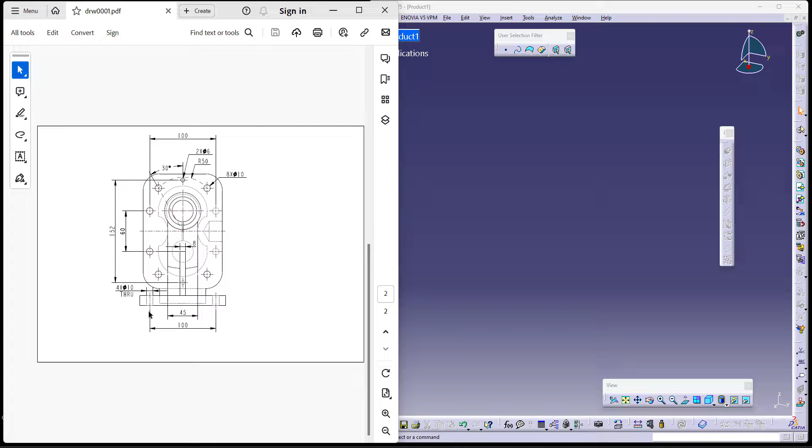I'd like to start with the front view, considering this as my 0, 0. So getting into Start Mechanical Design, since we are working on part design, I have a pad command to add material.

We will try to check the views and simultaneously make the model. It should maintain the exact views as shown in the drawing. In the machine design textbook, they have used the first angle projection, so before proceeding further, please check the angle of projection and then start working on your model.

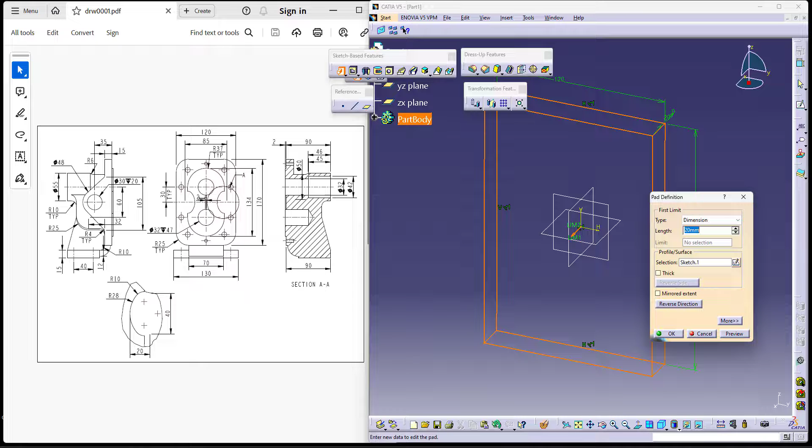Now the material is actually added up to 15. I'm saying this one is added up to 15, so let me try to add that up to 15.

Next, I'd like to add the shape. If you can see, the shape is actually added only till here, which is up to 2 mm. So I'd like to take it on this. Since it has dark lines, that means it's present over here.

In the next view, as you can see, it is hidden lines, that means it's not in the back view. This is in the front view, so I'm using the front view to create the same.

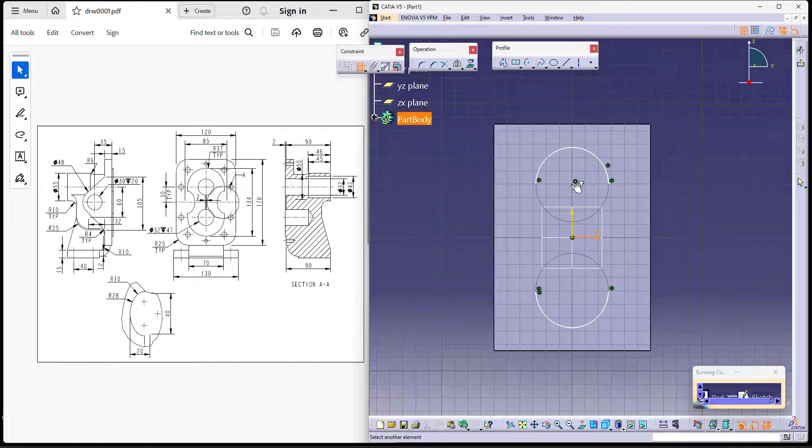And then I can use arcs, or I can use a circle as well. So let me try to take an arc and then mirror it onto the other side. Now the distance between this and this is 30 typical, that means both circles maintain equidistant from the center, so I can give that as 30.

Now the radii of this is 37, as you can see, so I'm giving this as 37. You can join these two by using your bitangent line. So I can just use bitangent line and bitangent line. Let me try to see if there are any openings or gaps. Since they are, let's try to join them together.

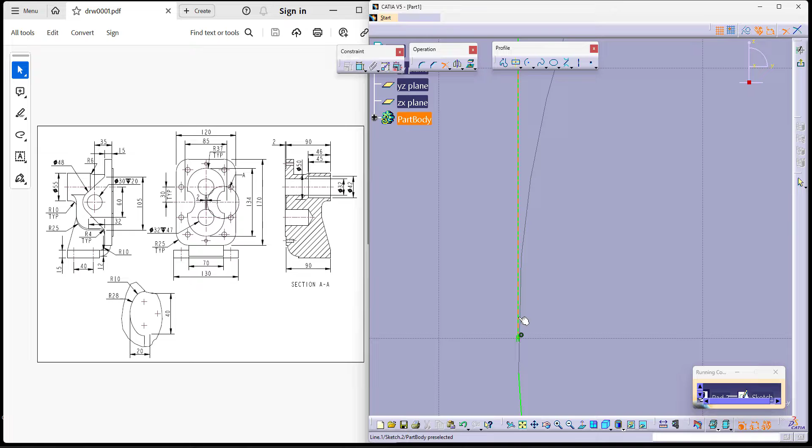This is my sketch. This is only added up to 2. I'll make this and cut later. So this is only till 2. You can see the feature.

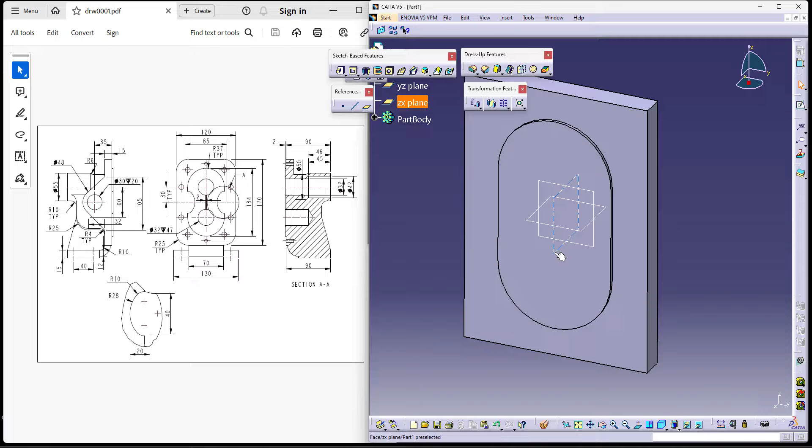Now you can start making the base, or you can start making this extrusion, but I prefer doing the base, as you can see. So I'll be working on the right view. First, let me try to make a sketch of the view and then proceed further.

Now let me go back to the right view. You can also use H and V variation, as you can see it's running from here, or you can also use the left view to create the shape, as you can see from here. Either way, whichever you're comfortable with, you can work on it. Right or left, it's pretty much the same.

I'm taking the arc from here and starting, as you can see. I'll start from the inner side because the inner side is actually controlling the full body. Let me go back to the right view and show you how it looks like. This is how it looks like.

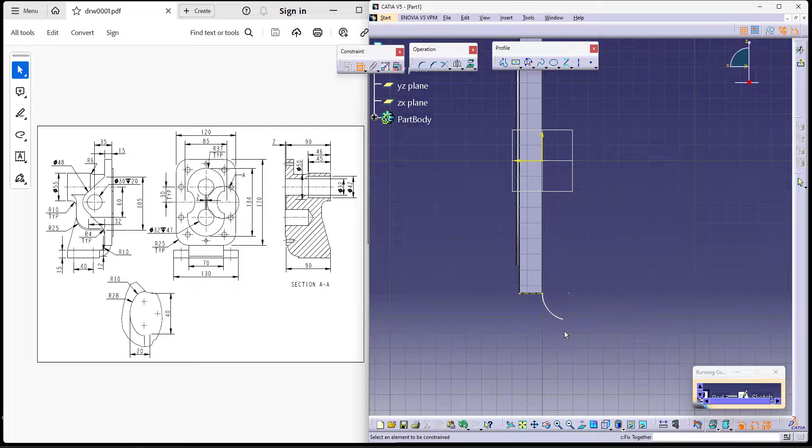So we do have to maintain certain dimensions again, so let me try to take those as well. This is supposed to be 10 as shown in the drawing, which we have just seen. Now this has actually been offset to 12 to create this shape.

So I'm just trying to use an offset command rather than stressing out and doing it again. So this is my 12, and we do know that we are supposed to join them together, so we can just directly join them. This is the first join. While doing the second join, I would prefer R10 as the main one because that is the first reference I have, and I can join these two as well.

Now this length is again 12. You can give this or you can constrain it as well.

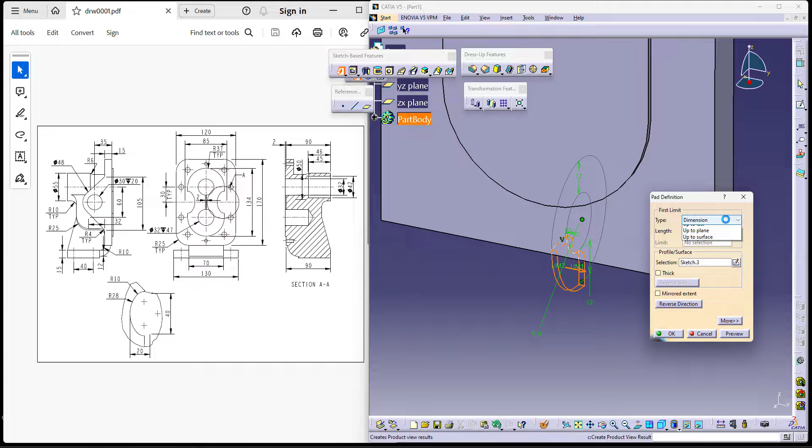Now let's see how much we're supposed to add. This is added up to 70 as shown in the front view, but I'll use a mid plane, which means I'll give 35 on either side.

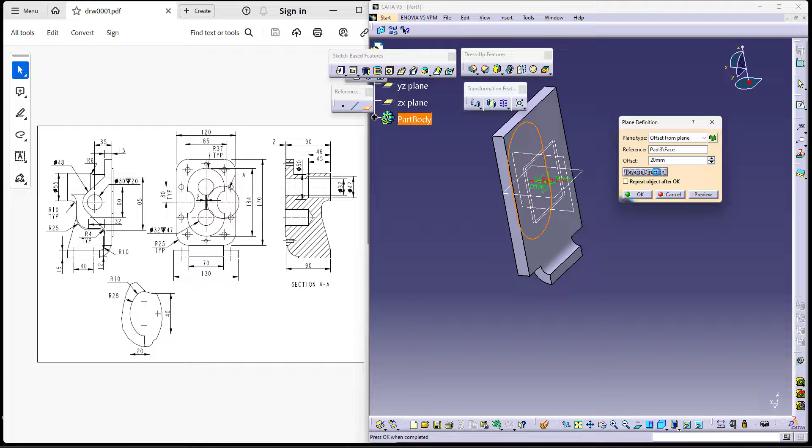Now, while continuing the model, let's keep in mind to maintain the dimensions. The base is actually till 90 from the back face, from here. So instead of subtracting, I'd like to take a reference at the 90 and use that as my reference for modeling. Now I can maintain the 90 dimension as well as the exact dimensions of the rectangular feature. As you can see, the rectangle feature begins from the top, from here.

So let's use this as a reference first and start making our model, which is a simple rectangle, and start constraining it as per our drawing. First and foremost is maintaining symmetry. Second is the length, given as 130, and the height is 15. So I'm taking this as 15.

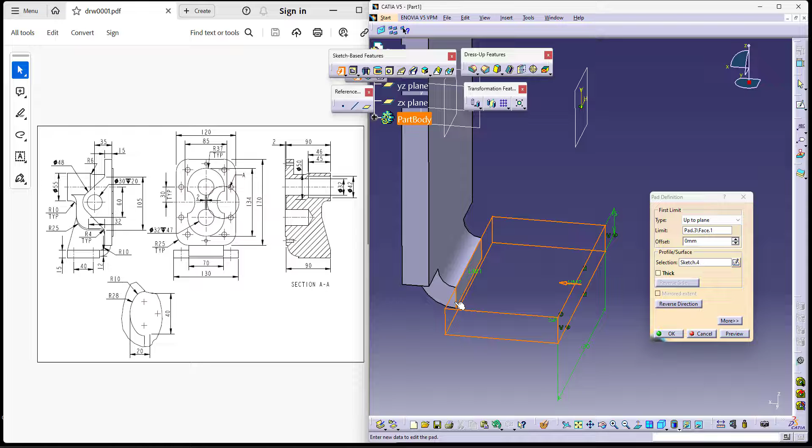Now, how much do you want to add it to? Since we've made it on the new plane, you can add it up to the next or up to the plane. But instead, I'll just select up to the plane and then select the face, so it can understand and add till then. Also, another important thing is if you move or make changes to this, the feature also auto updates itself, giving you a good flexible feature-based modeling if you use these types of references.

Now, continuing, I do have a feature here. I'd like to start from here and slowly create this support, then create this support, and add the shape. This is the process I'd like to follow, and then we can start removing whatever other shapes we have. To begin with, to add this, I have 46 and 50, and I don't know the overall length and everything.

So what I'll do is use shaft and add the material, because I know the overall 90 and the 46, and I can easily maintain it using the shaft rather than using my extrude or pad. So continuing, this is my reference.

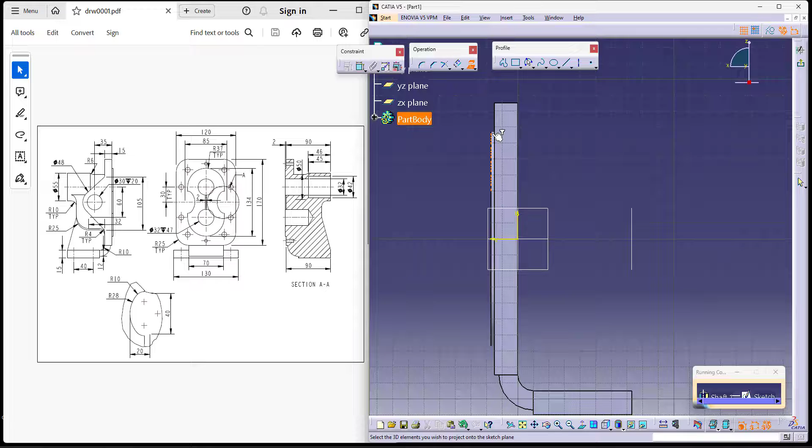The reference is similar to this, the circle which is 30. It's in the same line. You can use that reference, or of course you can take your own 30 dimension, but I use that—it's a little easier for us to do it. Going back to your right view, this is another reference which we'd require.

Now let's start making the actual profile of how we'd require the shaft. It goes this way, and I'm joining all of them together.

Now, we know that this is 46, the inner cut is actually 45, so they just got clubbed together. So this is 46. Let me try to move it this way, and then the overall dimension.

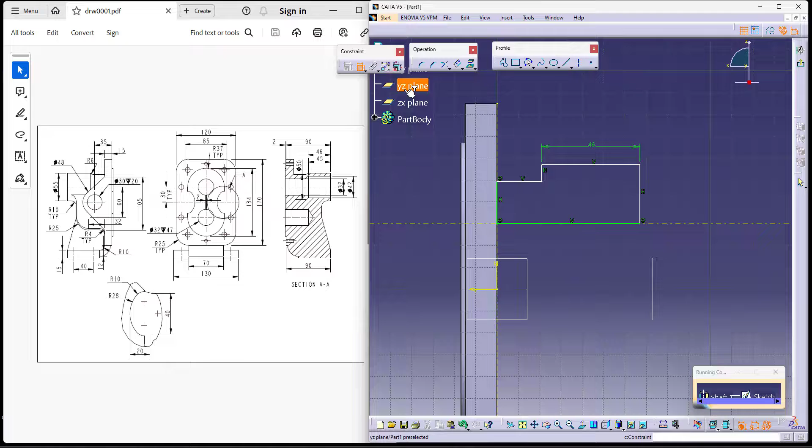Again, the dimension is from this face and not from this face, as you can see, but this base dimension was from this face. So I am trying to give this as 90. And you can see the dimensions.

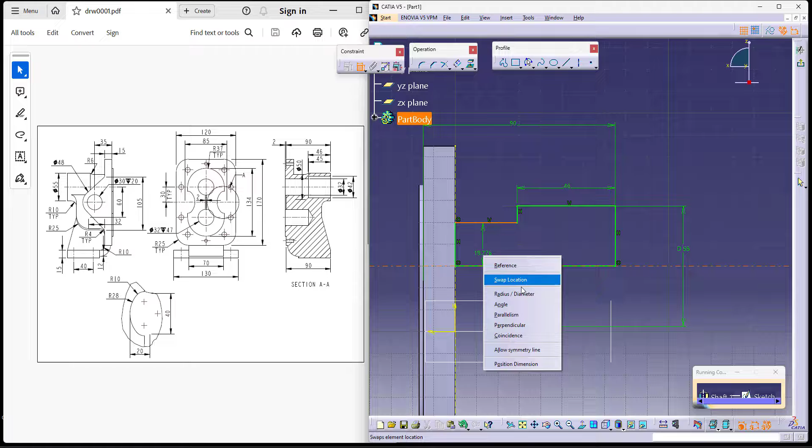Now, let's give the diameters. This is 55, shown over here. This is 50, again shown in the same view. Exit, and it tries to create a cylindrical shape. This is the cylinder.

Now you can give rounds here, since we're working on our supports. There's a round at this location, if you can see, R6. Let's try to give that and proceed further. I don't think it can take R—okay, it took R6. So, warning.

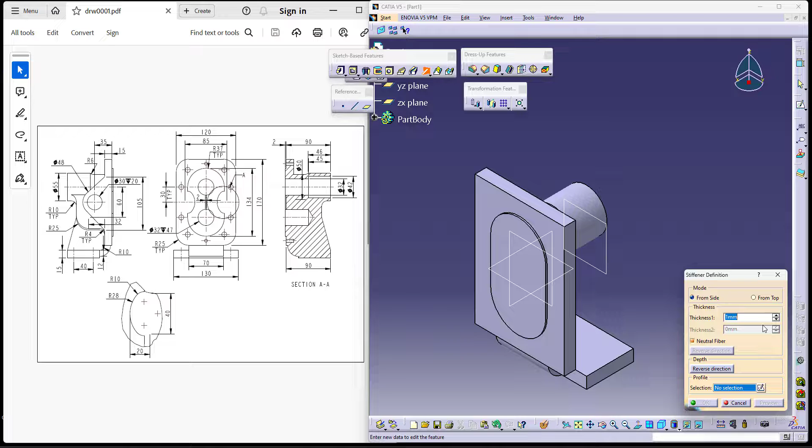Now let's try to create the support. We do have a stiffener as a support, and I'm trying to make it on the right sketch itself, considering the right view. I would like to use my references of the circle and the edges. So first, let's take this edge.

I don't need that, the base edge, and I would require these as well. So let me try to keep it in construction mode only and select this as my reference. The support is actually of this manner.

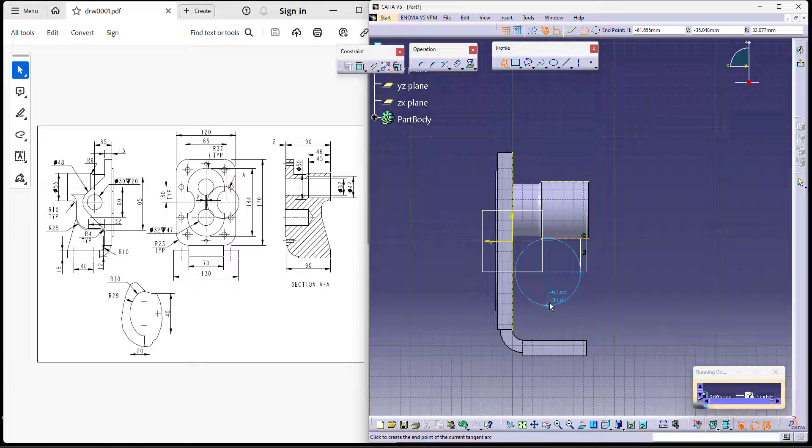Dimensions are given with respect to the center of the arc. I'm actually trying to take it this way and then try to keep it here. There is no tangency over here actually, so I'll try to delete that.

Now the dimension from the center to this is 60. Similarly, the dimension from the face to the center is 32, or face to the line, the end of the line is 32 - it's pretty much the same thing. Now we do know the radii, which is 25, so I'd like to give this as 25. And there is a vertical constraint missing on this.

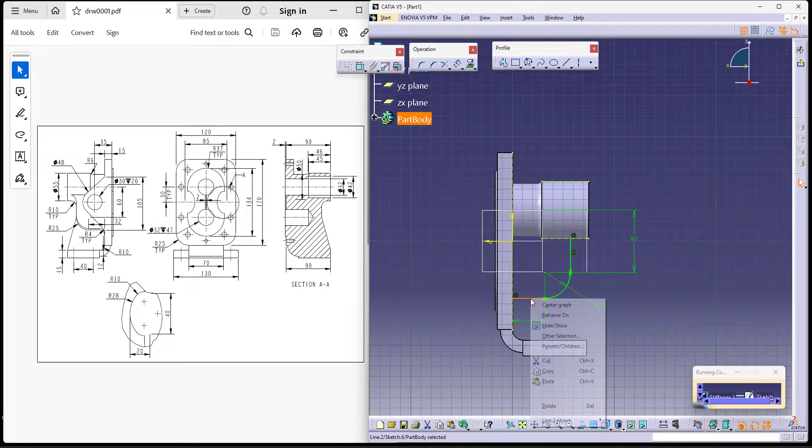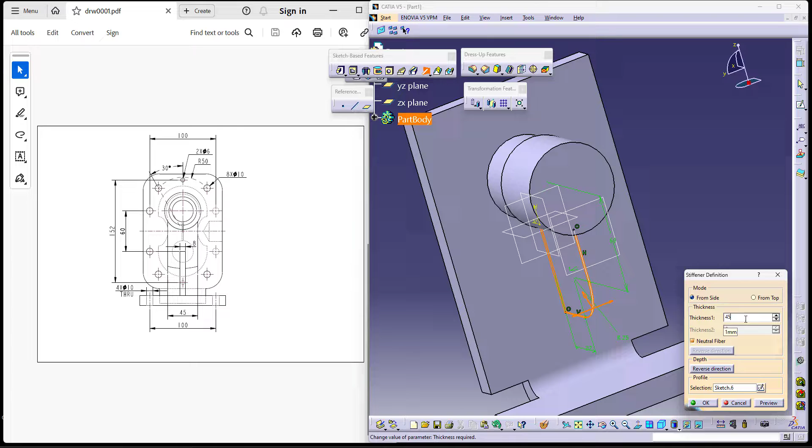Now when I say exit, it will ask me how much is the support. While creating the support, the dimension of the thickness of the support is actually not given in this sheet, but when you scroll down under this, you can see the thickness of the support is 45. Let's try to take that as 45. This is your actual support.

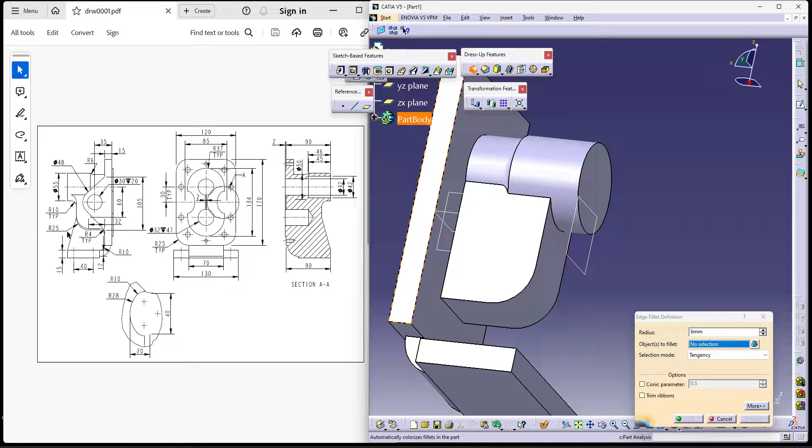Usually before giving stiffeners, you can give rounds because the stiffener actually tries to take the shape of the round as well. Considering that, you can do it here too. For instance, there's actually not here - you can do it here because there's a support which is coming there. So I can give it here as well, which is 6, and then you can work on it.

There is another support here which I'd like to make now. Again, I'm trying to make the sketch, selecting the right view. We are going to select the references as our requirement is, which is these 3.

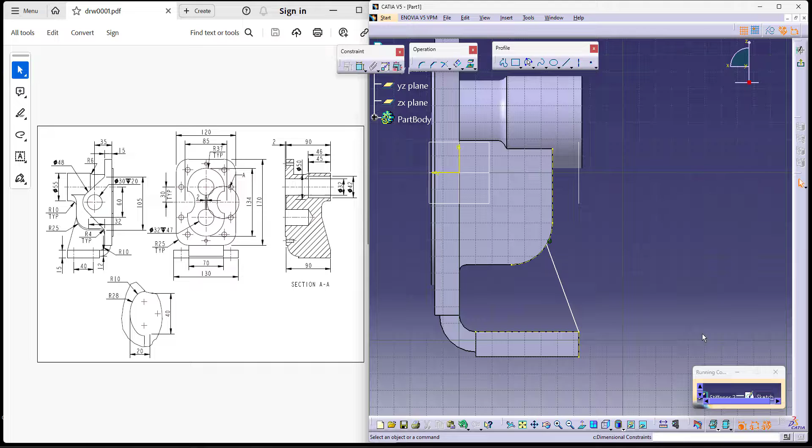Actually, we can use the top line as well, this way as it goes. Now, while making, I'd like to use my line this way. There is no dimension in this one, but in the second view, he has given the dimension that from this center to this is 60, in line with this. So I'd like to use that - from this center to the end of this is supposed to be 60. I'm taking that as 60.

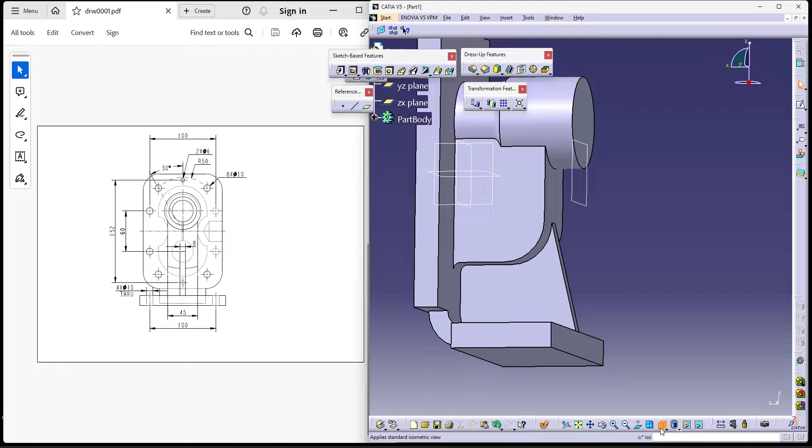Now when I exit, it tries to create the support. Now the thickness of the support is just 8. So when I am giving you the support, you can see that the round also takes the shape of itself on the corner. It is normally good to give rounds when you're doing these type of features.

Now, last but not the least, we do have another shape over here in the left view. So I am taking the left view to show you where the feature is. This is my left view. The feature is located on this face. The feature is actually of this shape, as you can see. So let's try to make that.

On this, I'd like to make a sketch. Now on the sketch, I'd like to start. So I would take a circle to start. I prefer this, I don't want to complicate it. And this is 48 - there are 2 parallel lines going this way and that way.

Now let me try to take a line and I use this as my reference first. Actually, there is an axis, but it has to be dependent on the face, because if we make any changes, it should auto update and maintain tangency to this. Similarly, I want the same line onto the other side and again maintain tangency.

Now we do know the dimensions that the circle center is at 35 from this face, not from the back face - so this is 35. And the distance between these two is 105. The distance between this and this is 105.

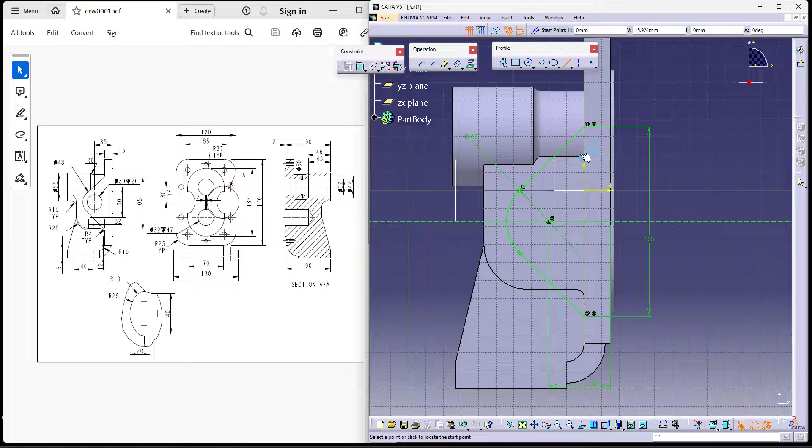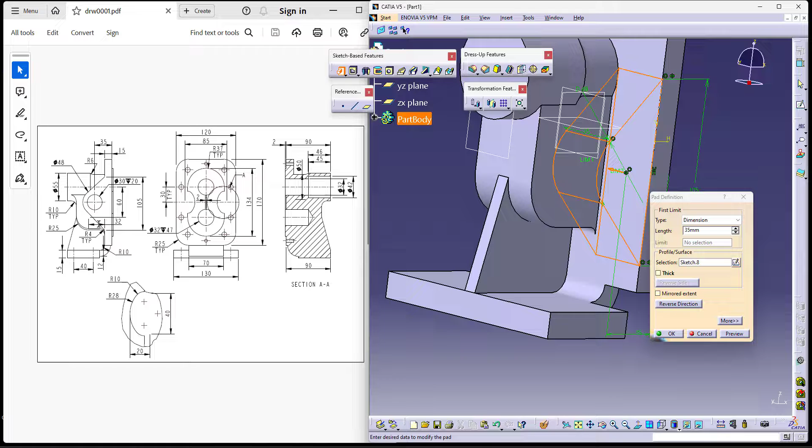Now, till where the material is supposed to be added - when you use add, pad, till where is it supposed to add? Whenever you see the view over here, you cannot understand till where the material is actually being added. But when you see in this view, you can see that there's a hole which is drilled over here up to the end extent. That means it's up to the feature of the stiffener. So you can add it up to the next surface if it can find, or you can select up to the selected. It usually finds up to next - this is how it actually adds the material.

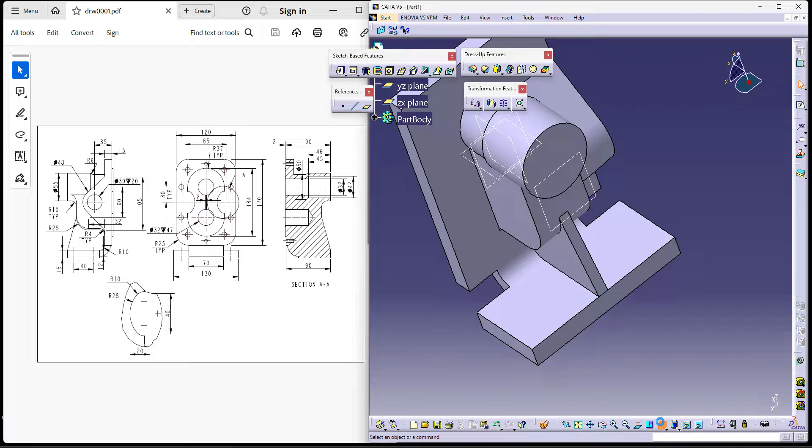Now going back into your isometric view, as per our views, the model actually looks like this. Now let's start removing the material one after the other and then proceed with our rounds. I have given few rounds which are necessary for the model. Let's try to remove the shape first using a pocket.

I'll use mirror and remove both of them in one go. I do have the width which is at 40. So let me take a line over here and maintain symmetry. This is 40. Let's try to maintain symmetry.

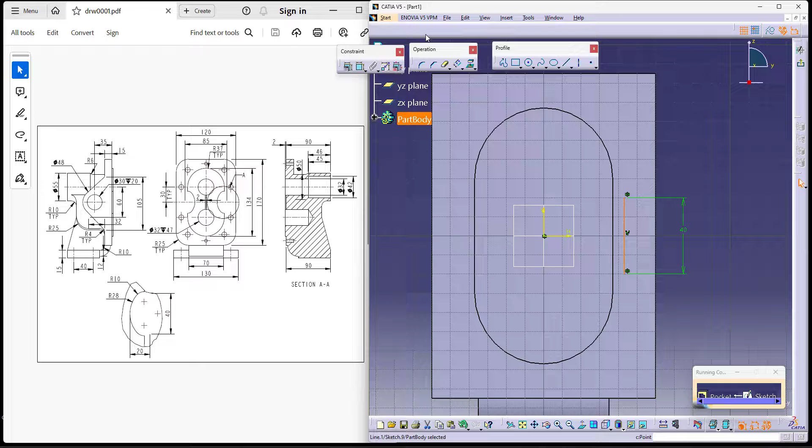Now the same thing has to be done on the other side. I need to make a mirror option because there's a distance given for us. The distance between these two is actually 85, as shown in the drawing. From here we do have a little different shape which is forming.

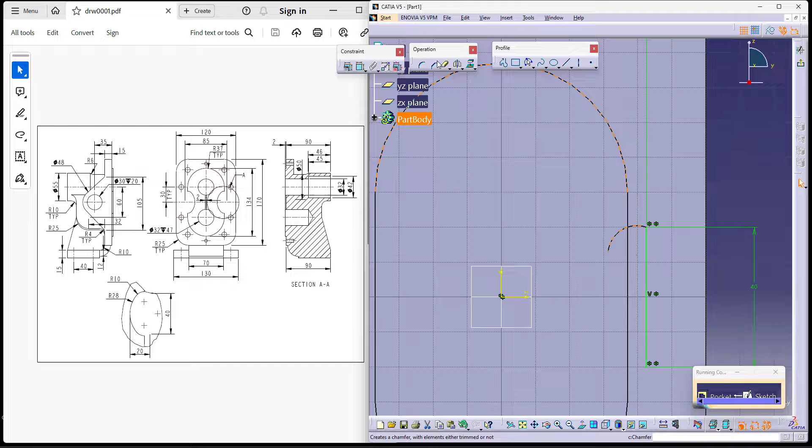It has R10 first, this is my R10. And then it has R28 - this is my R28, it has to maintain tangency. And I have R10 onto the other side again.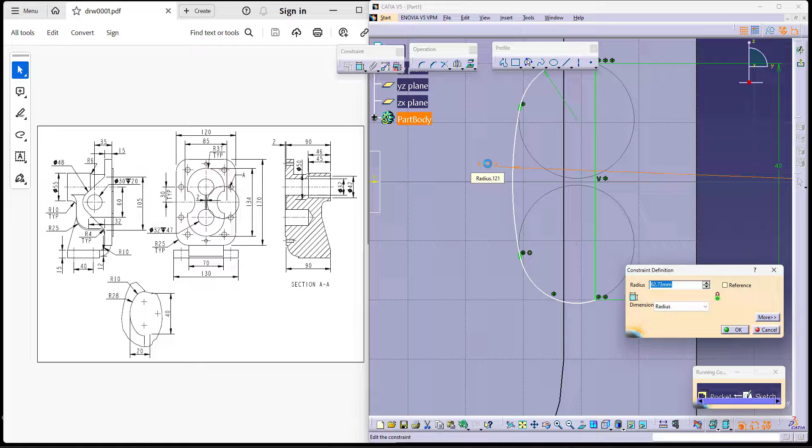Maintain tangency. Now we do know this is R28, so let's try to give that as R28, and then try to maintain the 20 - that is, from here till the end of this is supposed to be 20.

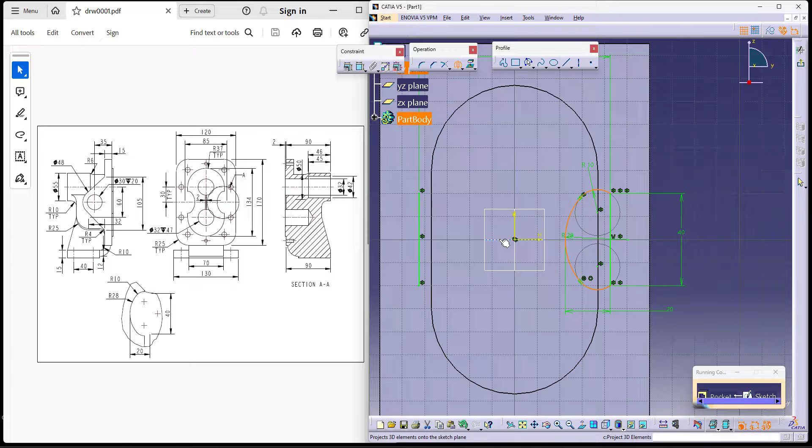Now the whole thing obviously should be onto the other side, so I'm just selecting all of them, mirroring it onto the other side and saying okay. Now this will remove the body. I want to remove it onto the other side, but up to the next, so it does it that way and removes the features.

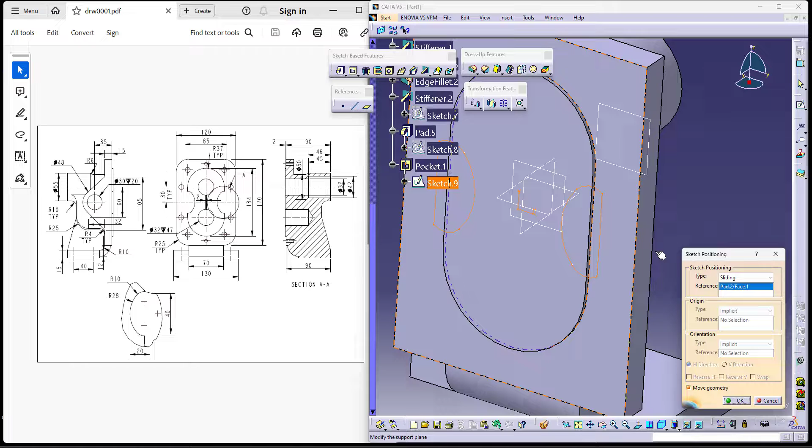Okay, I think I've selected the wrong plane. I've selected this plane, I want this plane. This is your cut.

Now you can start drilling your holes, but there is a first internal cut over here. Let's try to do that. We can do that using a groove command, which is similar to your shaft.

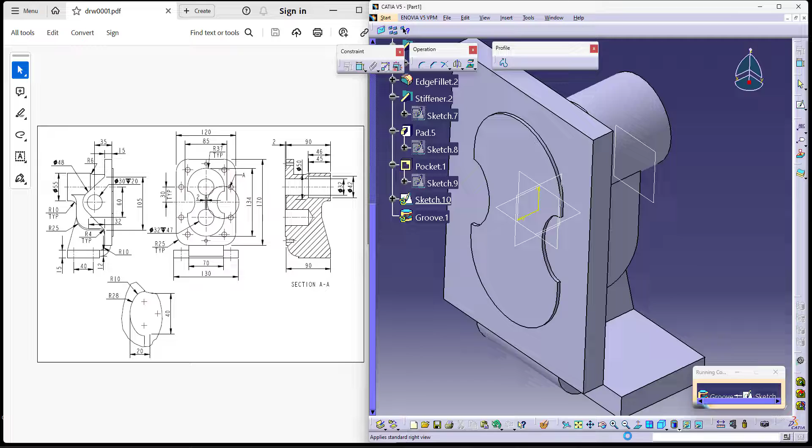I am considering the right view again, using my references again. Let's start - I think the cut is till the end, so let me try to use this as my reference as well. Now let's start making the cut.

It begins with 42 and ends with 32 till the end. I'll give the dimensions once I'm done. Now let's start taking the dimensions. This is 42 up to 45 cut, and similarly this is 32. I don't have to give the other dimension, it auto calculates it.

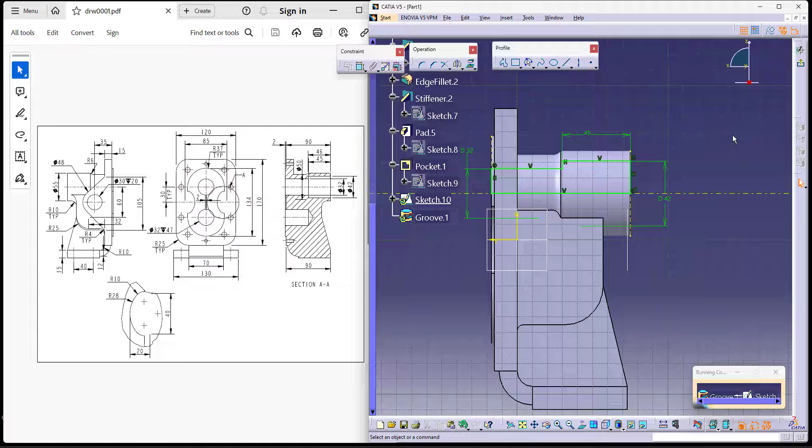Once I say exit, it tries to remove the material from the inner side. There is another hole at this location, as you can see, 32 depth of 47 with a V cut. So I can directly use a hole and do so. First, let's try to maintain concentricity with these two and say exit.

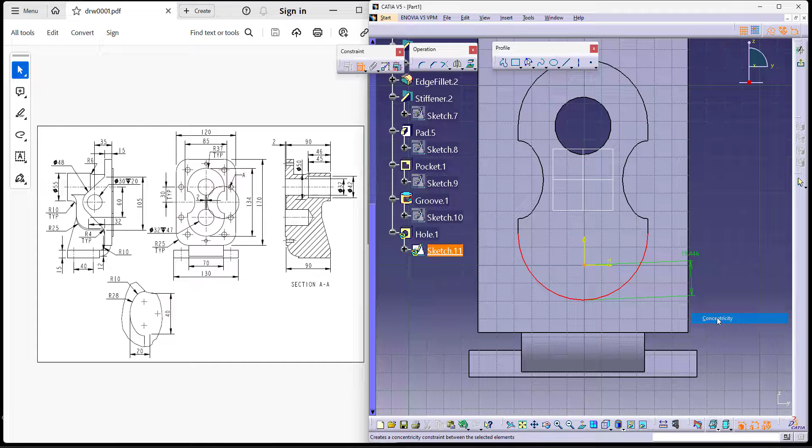Now let's try to give the dimension - the size is 32 and the depth is 47. But I do not need a flat bottom, I need a V cut. So you can see the V cut. This is your other hole.

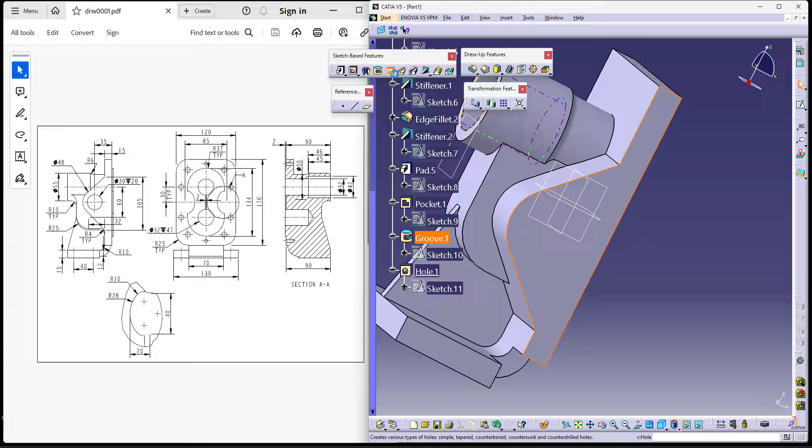There are a number of holes as shown in the drawing, so let's try to go one after the other. There's one more here, which is 30 dia and 20 depth. Let's try to take that too - 30 dia, 20 depth, it's actually a V cut. You can see it in this view, it's a V cut.

Let's try to give the shape and the position of it. The shape is actually given direct by default since I've selected the last time. And once I say OK, you'll be seeing that cut too.

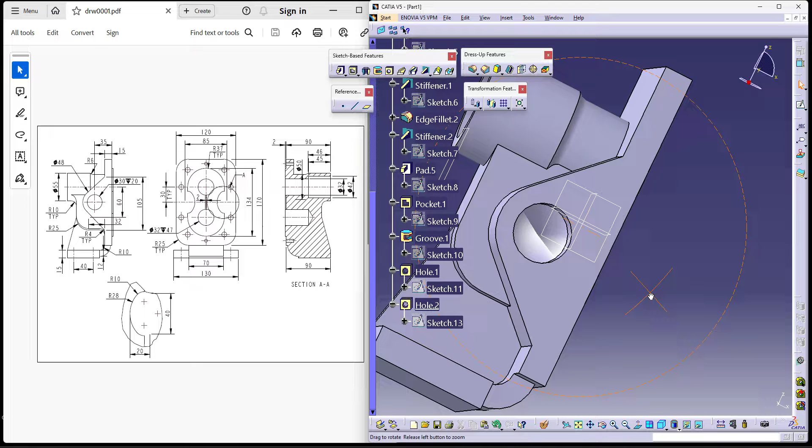Going back into the normal view, there are a few smaller holes which are shown over here. Let's try to take that. I can use a point pattern to do so, so I'd do that to make it less complicated. There are two holes here as well as here. First, let's try to take those.

One, I'd mirror it onto the other side. And I'll just select these two again, then mirror it onto the other side. These dimensions are already given to me - 100 and this is 60.

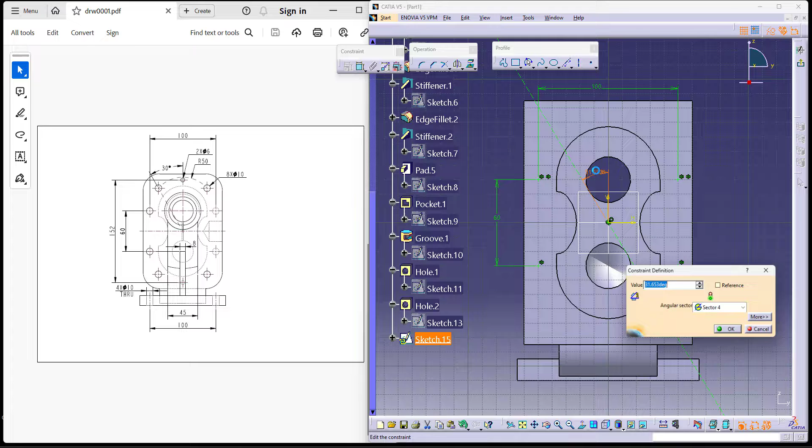There are other dimensions also which is at an angle of 30, and are given. So let's try to take the 30 reference first from the center and then start working on it. The difference between this and this is supposed to be 30, and obviously we'd require another R50 which is our reference. So I'm using the center arc as my reference and giving it - sorry, this is the reference, not that one. I'm using this as my reference and then giving the arc from here, assuming this is the center.

Let's mirror this onto the opposite side too to avoid confusion, and then coincide this over here. The dimension for this is actually R50.

Now there are points on this as well, so let's try to take those points too, which is at this location and at this location. Instead of repeating the whole thing again, I'll just be selecting these two and then I'll mirror it onto the opposite side, so I'll have 2 points here as well. Now when I exit, you can see that these points are there. Let me try to constrain this. I don't think it did constrain.

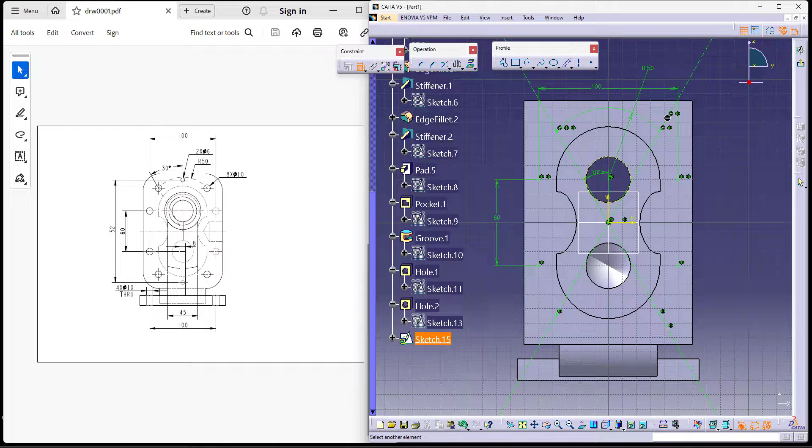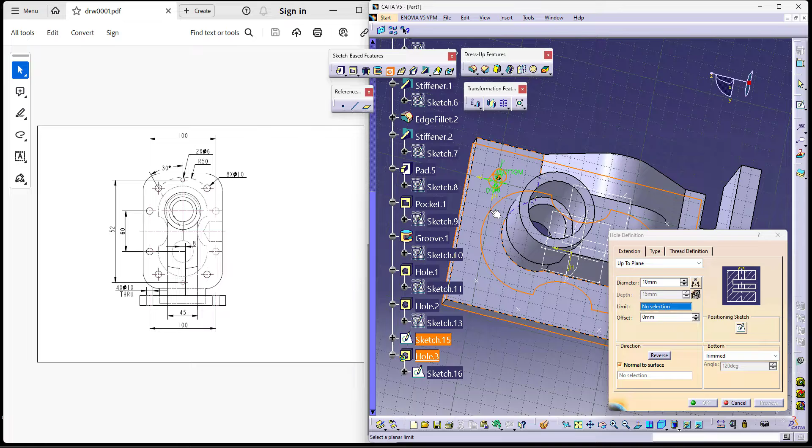These are my points. I have to give the holes at this location. So I'm just saying 8 dia at this point in this face, and dia is supposed to be 10. It is only up to the next face, which it can find, or I can also select the face and give it till what face it's supposed to be.

Now I can use my pattern and select the pattern directly to avoid further issues. Not circular pattern, I wanted point pattern. Use pattern and select the points, and say it till there. You can see the holes are actually there.

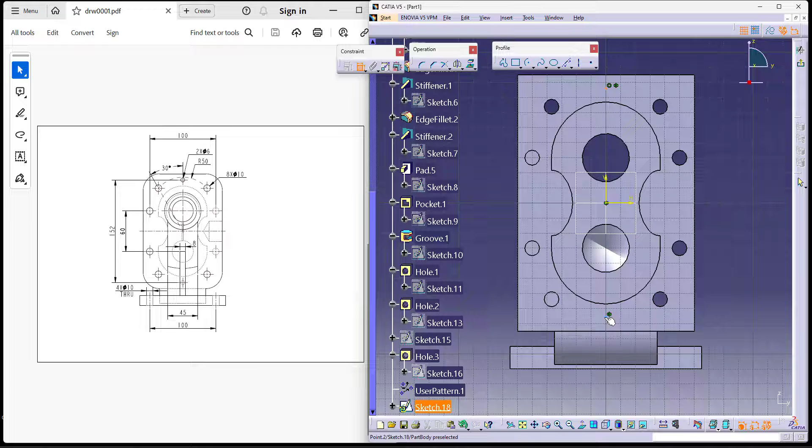There are 2 more holes at 152 distance. Again, you can use point pattern or you can use your normal sketch to do it. Point pattern seems a little easier for me, so I'm using the point pattern and I can give the distance, maintaining the distance between these two as 152.

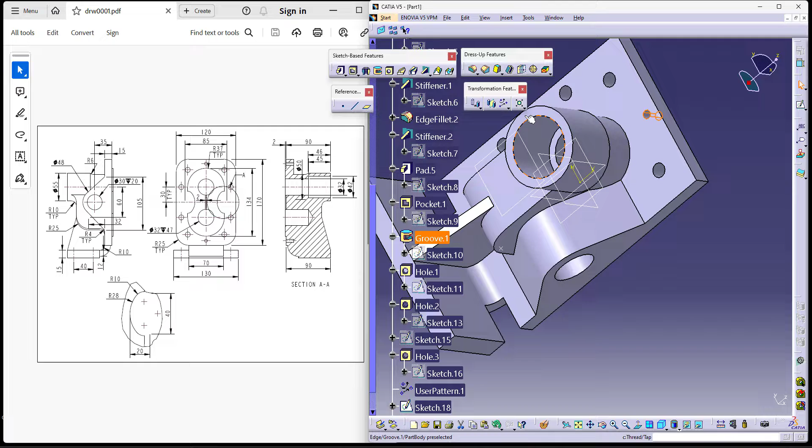On this, I have 2 into 6 holes. As you can see, they're only till here. So I'll give 6 dia for the 2 holes, select it only till here, not further, and say OK. I can either mirror or use point pattern again. Since point pattern is there, I've used that.

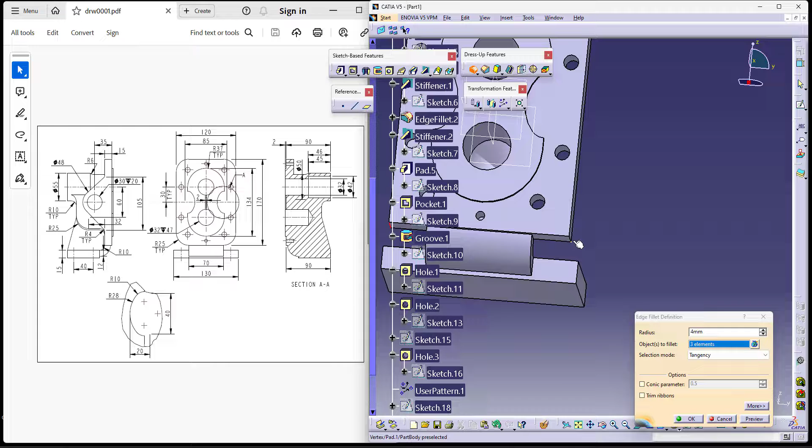These are your holes. Apart from this, the leftover things are your rounds, so you can give your rounds. These are 25 for this. You can just select all 4 edges and give R25. This is supposed to be 25.

There are rounds here as well. Let me try to give this round and not over there at this edge. This is actually R10 - it's given over here as R10, so I'm just taking that as R10. This is one actually important round, as you can see.

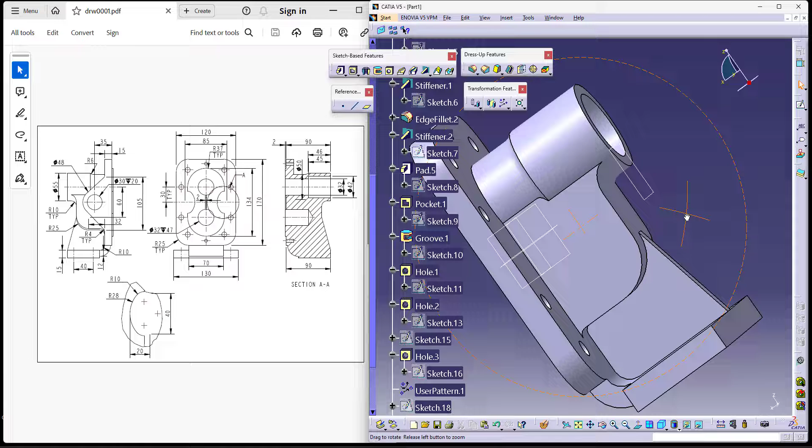There are rounds at this edge too. When it goes over here, I think it's just 4 mm. You can just give it as 4 mm. These are your rounds. This is how you actually read and work on a model.

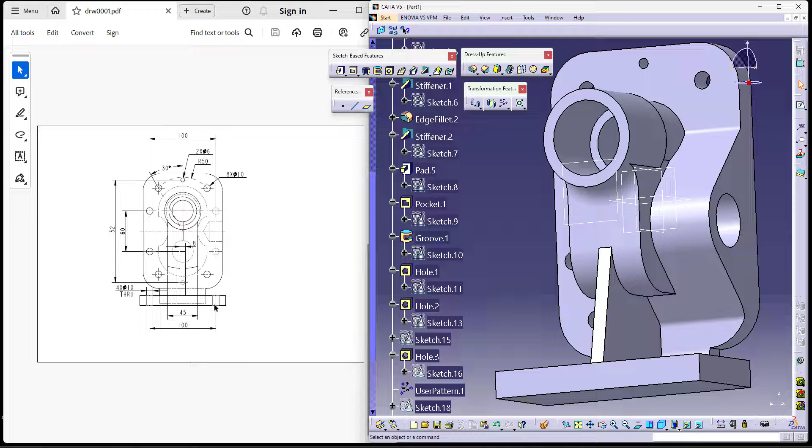I'm so sorry, I forgot these holes which are at the bottom. Let me try to take those as well before we exit the video. I'm sorry for the inconvenience. This is one sketch, and there's another one here.

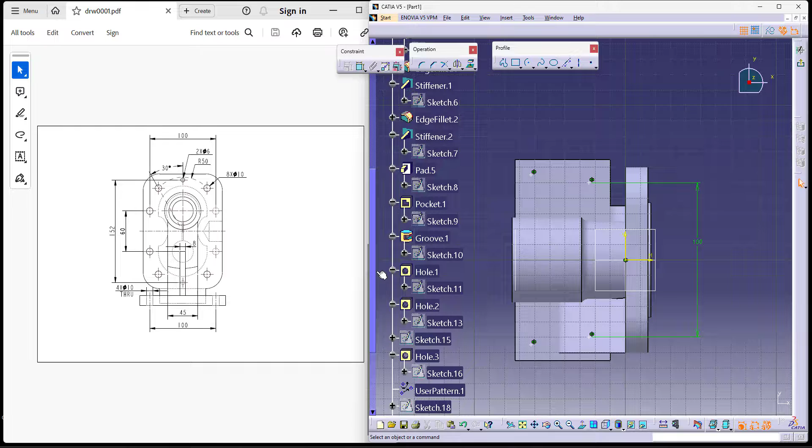I can mirror them both onto the opposite side. There's a distance given actually which is 100 in between these two, so I'd like to take the distance between these two as 100. Another important one is the dimension between these two on the other side, which is actually 40.

There is no top view given to us, so I am just trying to use the other views and give you the dimensions. This is supposed to be 40, and they are supposed to be inline, so I'll just try to coincide them, or just make them inline.

I'll use a reference instead. Let me try to use a reference and coincide them on that. I should have done it after giving the dimensions. Now, these four are the dimensions. I have to give a certain dimension here, which is not given there, so I'll just give a certain dimension and say exit.

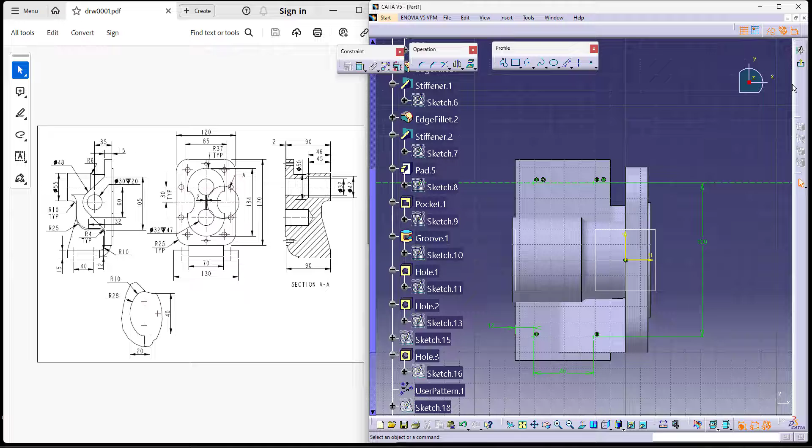Now I can drill a hole here. The hole is actually 4 into 10, which is through. Over here, I'll just give it as 10, and since they specified it to be through, I'll give that. Same way, I'll be using a point pattern to work on it too.

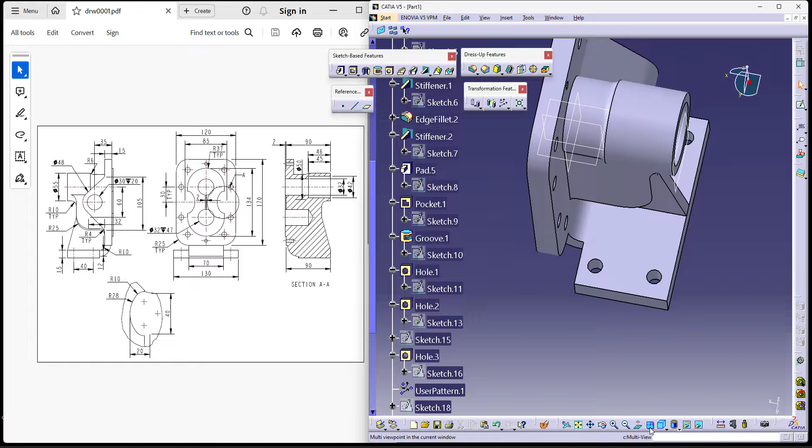These are the features. This is how you work on a model when you have multiple views. This is a mounting bracket for a rotary gear assembly.

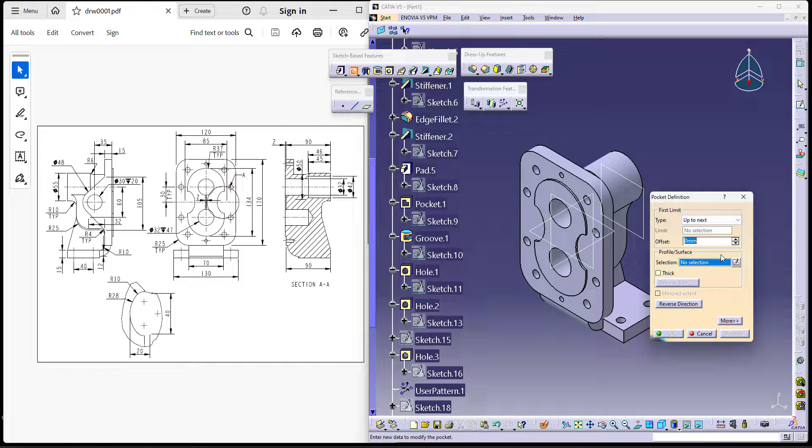Last but not least, I have one more feature to make. I'm so sorry again, I'd like to start it from this face. As you can see, there's a small slot cut in between this and this. It got missed in the flow of making holes.

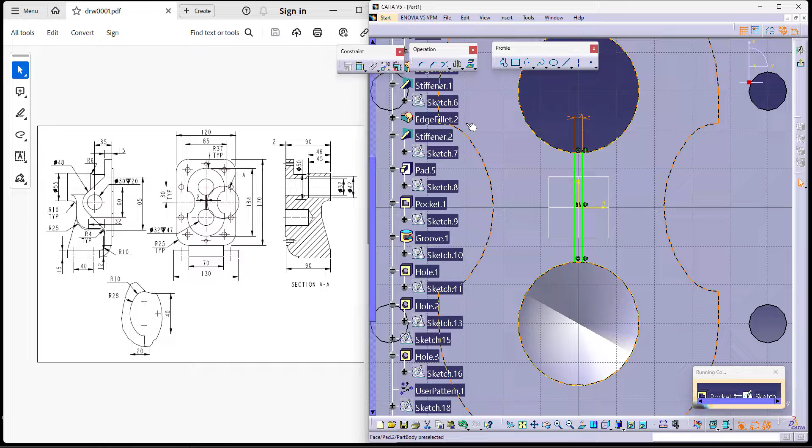I can mirror it onto the opposite side, and the distance between these two is actually 2. It's a very small slot, that's probably why we missed it. So I do have a round here, and similarly I can make a round here as well. This is supposed to be cut up to next, this side. This is your slot cut.